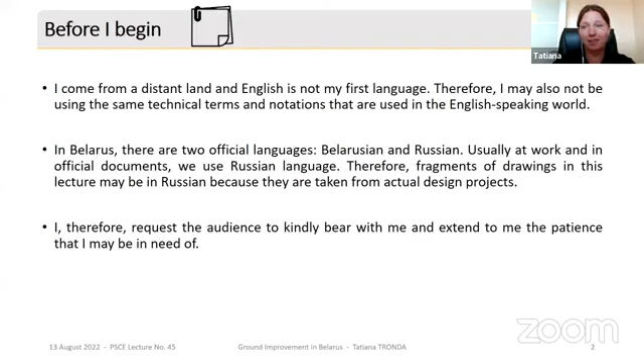My lecture is divided into several parts, listed in the slide: introduction, a short geology of Belarus, common and complicated geological conditions, the point of conventional foundations generally used here in Belarus with some examples and experience, the point of ground improvement with a short overview and history, several projects of ground improvement experience in Belarus, and conclusions and references used for this presentation.

Introduction. As we know, all loads from buildings and structures are ultimately transferred to the ground. Nowadays there are many types of foundations used to transmit loads to the ground, but in some cases ground improvement may be required. This lecture shortly covers the main aspects of geology of Belarus and presents the experience of conventional foundations and ground improvement in Belarus, comparing conventional foundations and their experience with ground improvement methods and experience. In general, 7 cases are considered in the lecture, with the main emphasis given to the ground improvement method using dry concrete columns, discussed near the end.

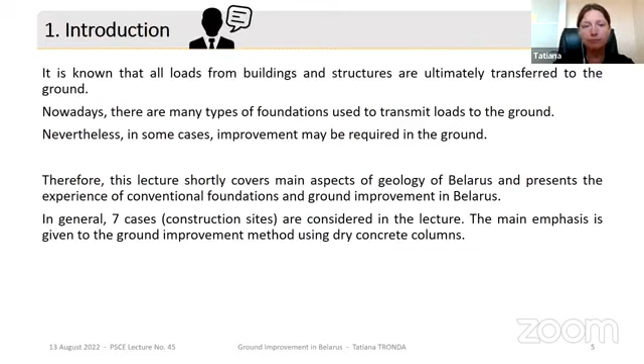Geology of Belarus. You can see in the map how far I am right now from Pakistan — Pakistan is here and Belarus is here. It's located in the eastern part of Europe.

Belarus is located somewhere between Poland and Russia, as you can see. Of course, its location influences the geology of Belarus.

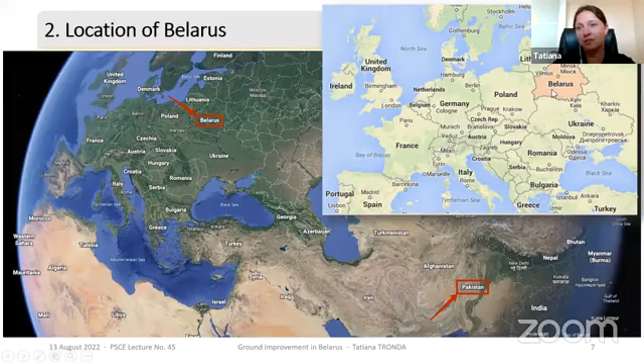Most of the territory of Belarus is covered with quaternary deposits, with thickness ranging from several meters to 300 meters. The deposits are composed of a complex of glacial, water glacial, lacustrine, alluvial, loess, Aeolian, and bog formations. A feature of quaternary deposits here is a relatively high water level.

The deposits of the glacial complex constitute about 88% of the total volume. According to classification by Matveyev, the main genetic types of deposits of the glacial formation in Belarus include moraine, fluvial glacial, and lacustrine glacial.

So for that, we can see the map of geomorphology of Belarus. Briefly, in the north of the country there are many lacustrine and alluvial lowlands. In the center, many moraine and fluvial glacial lowlands and plains, and in the south there are many lacustrine and alluvial lowlands.

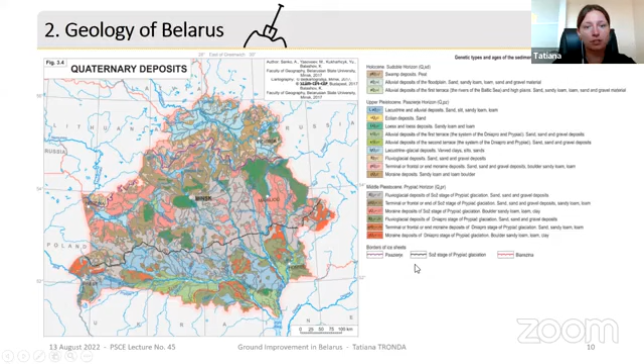As I said, common geological conditions in Belarus include sand, clay sands, and sandy clays. We also have just clays, but that's quite rare, and in most cases they are in the north of Belarus.

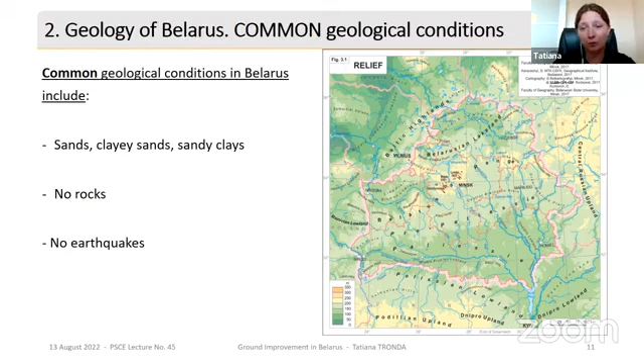So we don't have rocks, and we don't have earthquakes here, but yes, we can feel some earthquakes, though they are far from our territory. We don't usually calculate or design our foundations and structures for earthquake influence or anything like this.

Further, I'd like to share some information about common geological conditions. I took this information from one of the design projects, and you can see the geological cross-section of this construction site, and the soils which we have.

Usually a lot of sandy soils, fine sands, medium sands, gravelly or coarse sands, as you can see, but also clay sand. In most cases, yes, we have clay sands.

The next slide can show you again the same information. Just before we go back, here we can see the results of CPT tests, and the next slide shows the results of dynamic tests at this construction site.

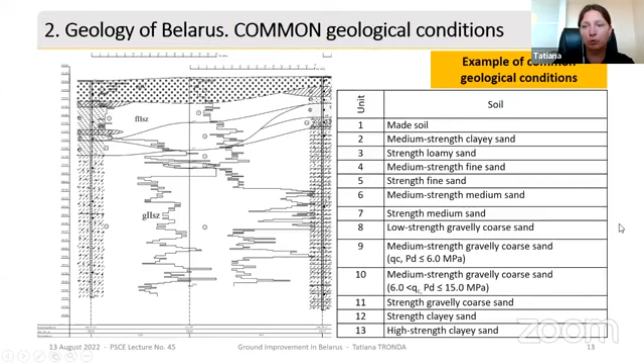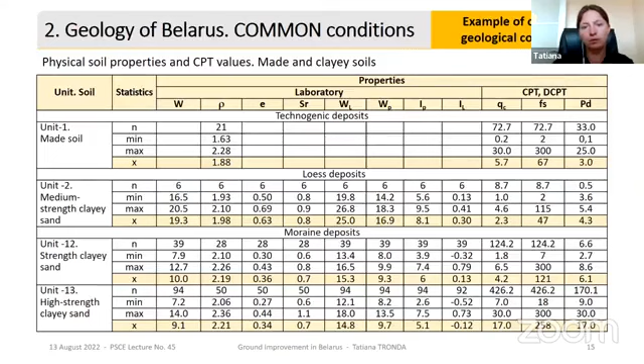Not all of our soils have such high saturation, but almost all at the top of the ground, yes, they will be quite saturated.

The next slide shows you the same information, but for sandy soils, as you can see. For loamy sand and fine sands, water content is about 7, 5, 6, 4%, and some results of CPT tests are also here. At the end of this table, you can also see some values for sandy soils.

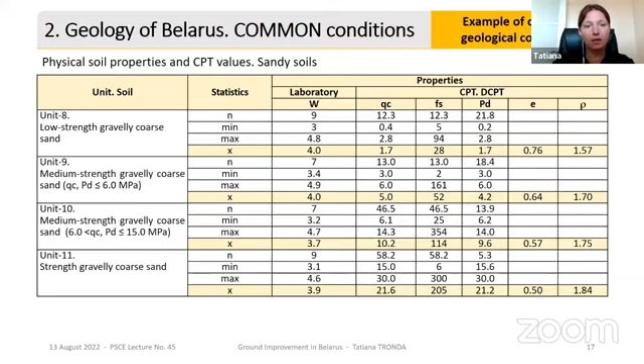So that was common geological conditions for Belarus, but if we talk about complicated conditions, we can describe them as usually including high moisture content, high water level, soft clay soils, loess soils, peat soils, soils with organic inclusions, and so on.

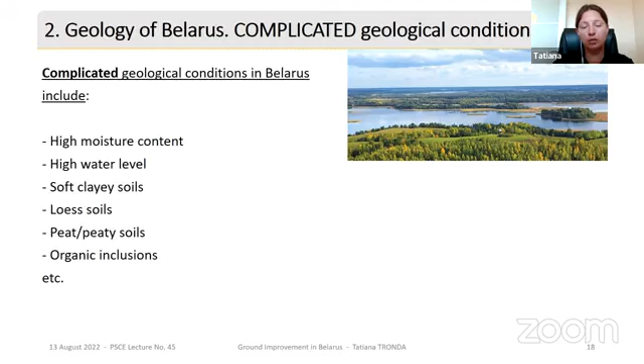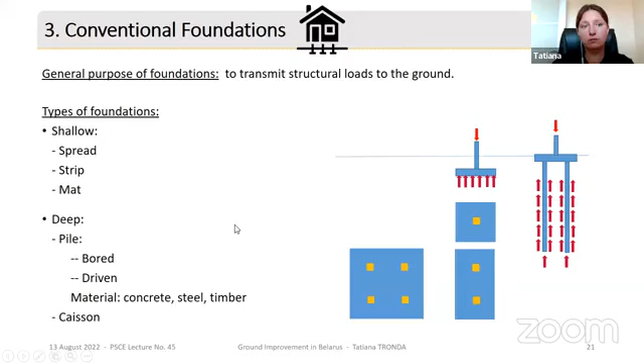This information is in general for conventional foundations, but what about Belarus? The next slide shows that yes, we use all types of shallow foundations, and also pile foundations, not only driven and bored piles, but also vibro-stamped piles. As for materials, we usually use concrete and sometimes steel, but I don't have any information about timber piles nowadays, so maybe we don't use them anymore.

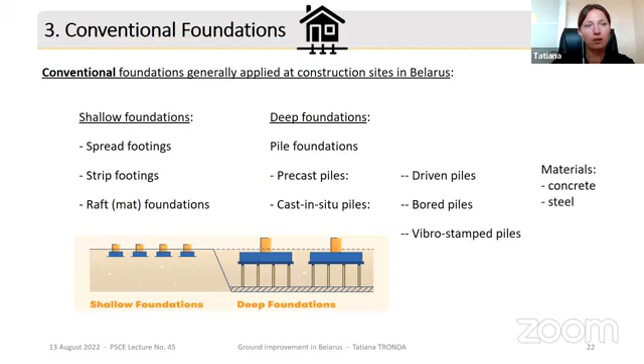So let's go further. Here I'd like to share some information about experience of conventional foundations which we use in complicated ground conditions. There will be 4 cases, for solutions, and I'd like to give this information just to compare it later with the ground improvement methods which we use for another construction site. So yes, we can apply a pile foundation almost at each construction site, but it's not usually the most suitable solution or something like this.

So the first project is an apartment house in Gomel, in the south of Belarus. Here you can see such soils as sands, but also sands with peat and organic inclusions. They are located somewhere here, unit number 10. So they are here.

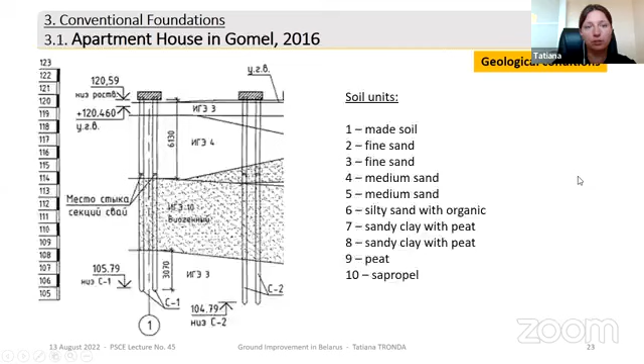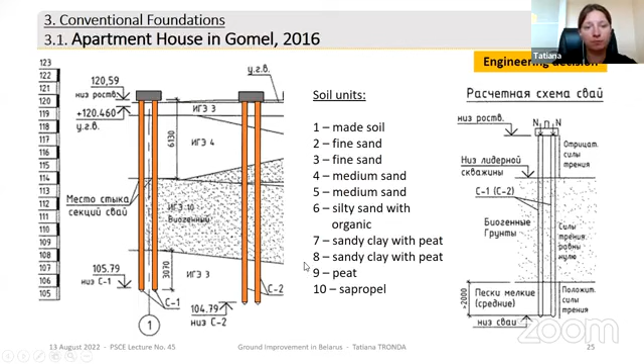So it was decided to use at this construction site ordinary driven piles. Right now you can see them in the slide here. These piles were located on the bearing walls.

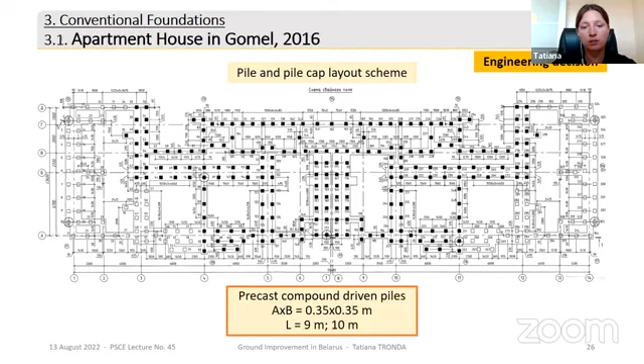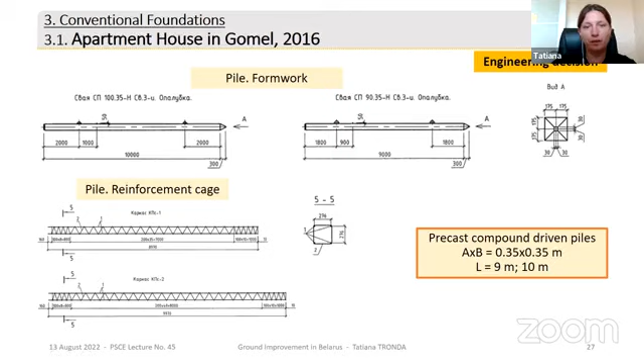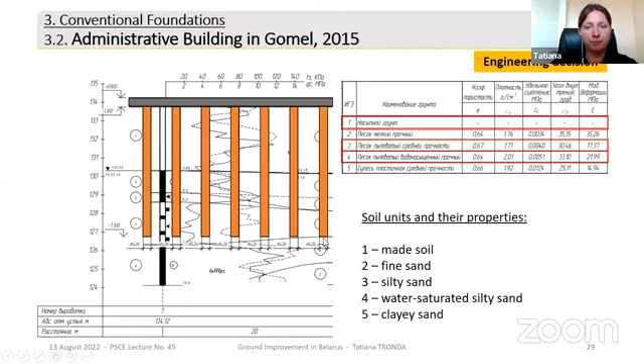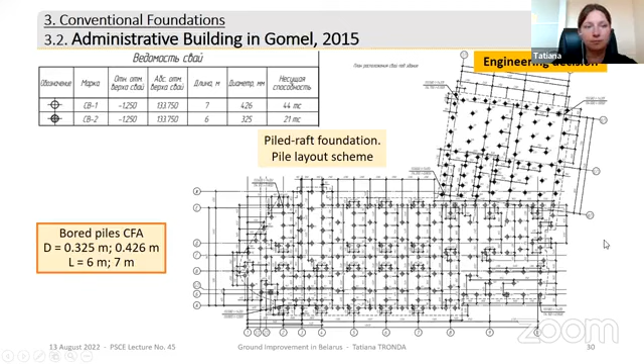So we apply piles here, and in this project there were bored piles using the CFA technology. The length of piles was 6 and 7 meters, and here in the slide you can see again the pile layout scheme, how these piles were located. The next slide shows detailed drawings of these piles, formwork, and reinforcement cages.

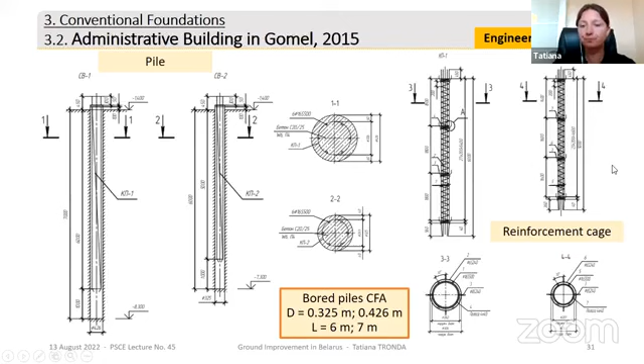Just to transfer all loads from the upper structures and building into more strong layers.

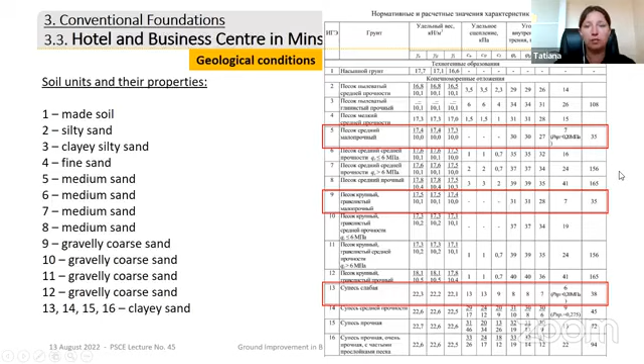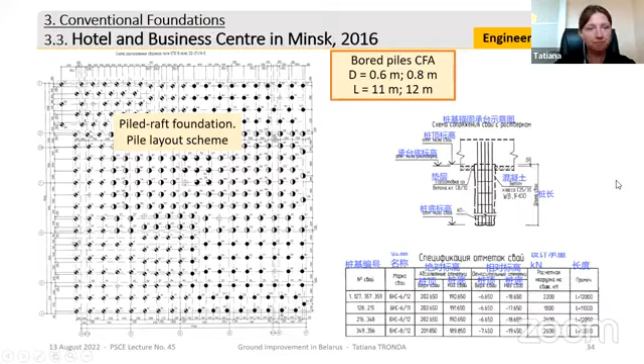Some information from the project. Don't pay so much attention to the Chinese language because it was a customer from China, so it was a double language project in Russian and Chinese. This is information just from the design documents, and some information about the reinforcement cage and about the piles, how they were constructed and installed, shortly here.

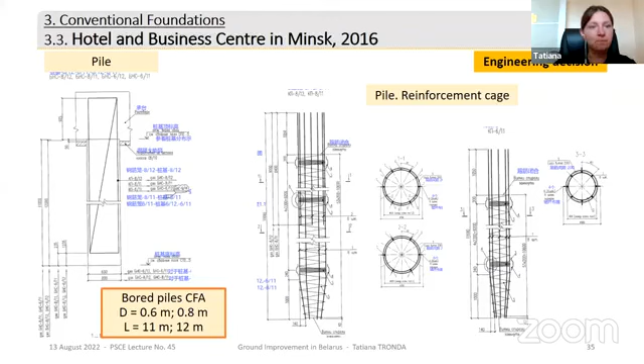Just for a remark, here we use a comma, not a dot, to divide parts of numbers. In the English speaking world we use a dot, yes, like 5.5. Just don't pay attention that we use here a comma, not a dot.

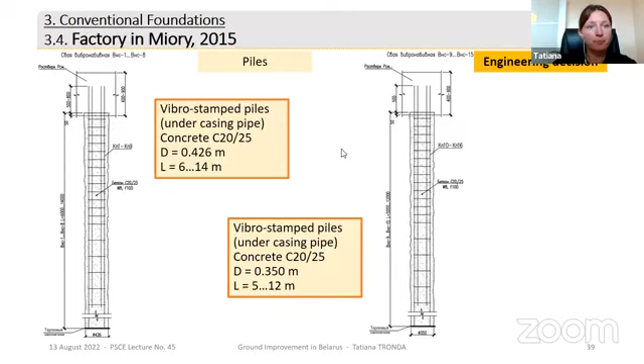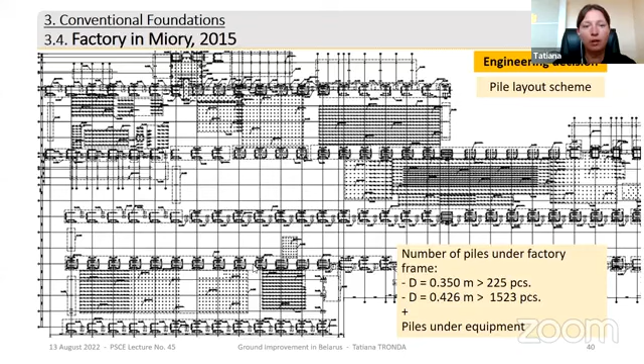This is just to show you the mass of these piles under this factory, a fragment of the pile layout scheme. It's not full here, but just to show you how many piles there were in this construction site. There were piles under bearing columns and also under equipment. Here, caps and piles under bearing columns, you can see in the narrow straight line, and in the middle, there are places with piles for equipment.

So this is all the examples, let's go further. Satisfactory foundations, as we discussed, prevent in-ground failure of strength and unacceptable settlements. Here in Belarus, we usually pay more attention to settlements, and this is obligatory for design and calculations of foundations here. But in some cases, ground improvement may be needed, for example, when one or both of the above goals may not be met.

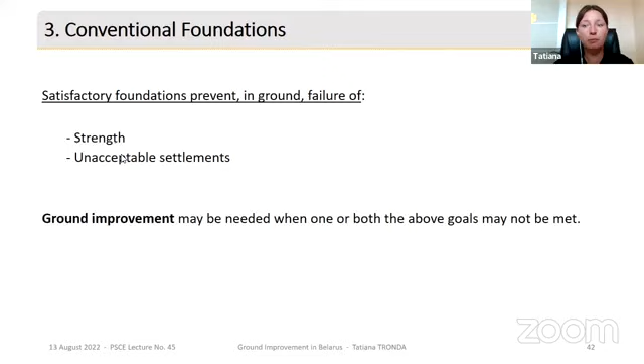The next chapter is ground improvement. Just shortly, information from overview and history. Ground improvement is the procedure typically defined as using mechanical means to improve poor ground conditions. Ground improvement methods improve the engineering properties of the soil mass, which is treated to meet project performance requirements. Common reasons for ground improvement include improved bearing capacity, increased density, control of settlements and permeability, mitigating liquefaction, and increasing slope stability.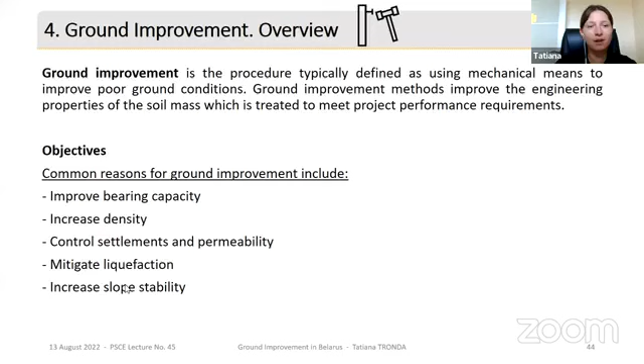So here in this lecture, we will discuss mostly the cases when we try to control settlements, as I said before, because when we have quite soft clay soils, this is the problem for big settlements which can occur after construction. So this is the main, almost the main, reason to use ground improvement in Belarus. But yes, we also use other methods, and there are other reasons for using ground improvement.

Shortly from history of ground improvement, I'd like to remind that ground improvement methods have been used since ancient times, and even, for example, about 6,000 years ago in China, rammed columns were used. Also, soil compaction methods using rammers have also been employed since Neolithic ages. Different types of rammers were used about 1,000 years ago.

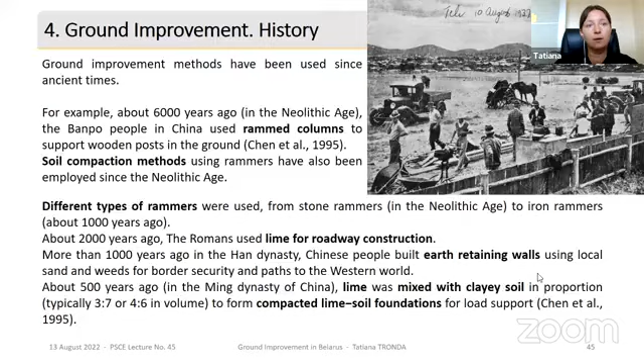About 2,000 years ago, the Romans used lime for roadway construction and so on. Many ground improvement methods were used in China in ancient times, about 500 or 1,000 years ago, and so on.

What about modern ground improvement methods? They were developed since the 1920s. For example, the use of vertical sand drains to accelerate consolidation of soft soils was first proposed in 1925, and then patented in 1926 in the United States. Also, cotton fabric was used in the United States, for example, in 1926. The vibro flotation method was developed in Germany and used from 1937. The first type of prefabricated vertical drains was developed in Sweden in 1947, and so on and so forth.

As you can see, it's not been so many years, just about 100 years, for modern ground improvement methods. So they are still in development, and there are some novel and new methods in the world.

Factors influencing the choice of ground improvement methods are as follows: the soil type, quantum and depth, and its properties, also the properties which we would like or desire to receive after improvement. Also the availability of materials, skills, and equipment which we have to perform ground improvement at a certain construction site, and economics.

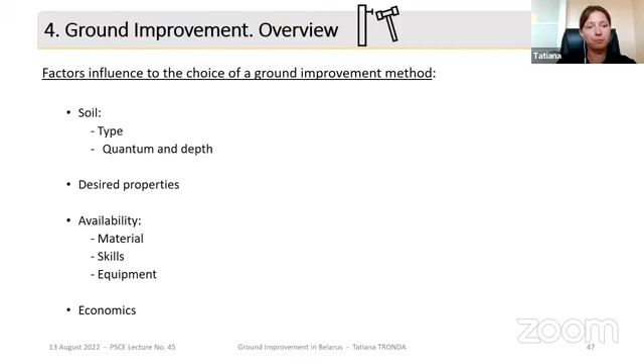The next slide shows you the classification of ground improvement methods adopted by Technical Committee 17, ISSMGE. I took this information from the website, and I'd like to share and remark on those methods which we use here in Belarus. Not all of them we use here, so in yellow you can see the methods which we use.

In the category of ground improvement without admixtures in non-cohesive soils or fill materials, we use the method of surface compaction, using a variety of compaction machines. Also, in gray you can see I marked dynamic compaction using a heavy weight dropped down. It's in gray just because we have some regulation on this method, but I have no information that we use this technology nowadays. So more often we use surface compaction.

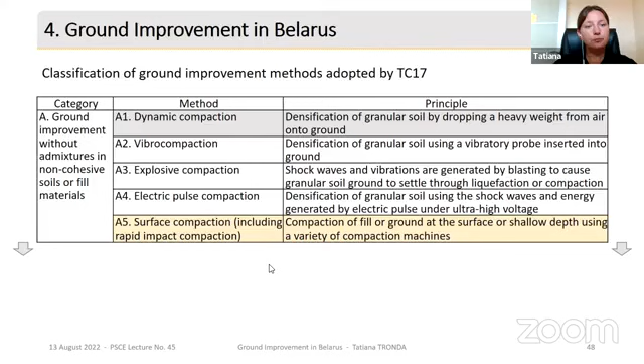The next category is ground improvement without admixtures in cohesive soils. Here you can see in yellow, again, I marked the methods which we use in Belarus: replacement and displacement, and preloading using fill.

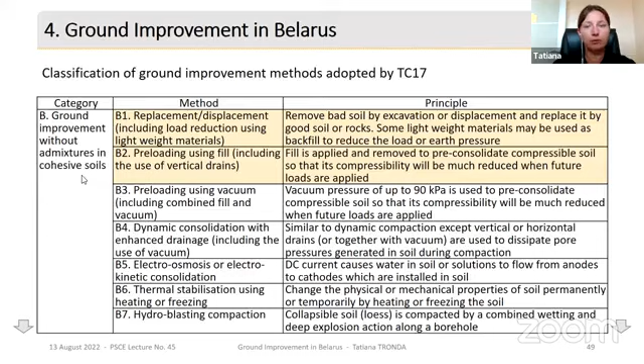The next category is ground improvement with admixtures or inclusions. Here we use methods such as vibro replacement or stone columns, sand compaction piles, rigid inclusions, and geosynthetics. I'd like to add that we also use not only sand or stone columns, but dry concrete columns, which we will discuss almost at the end of this lecture.

The next category is ground improvement with grouting type admixtures. Here we use methods such as particulate grouting and jet grouting. We use it, not so often, but yes, we can use it.

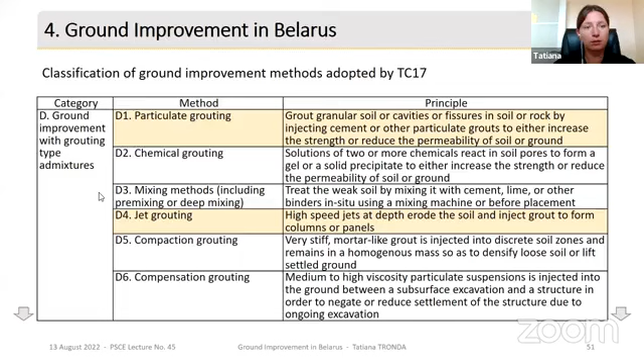And the last category, earth reinforcement. We use here almost all methods: geosynthetics, ground anchors, and biological methods as well.

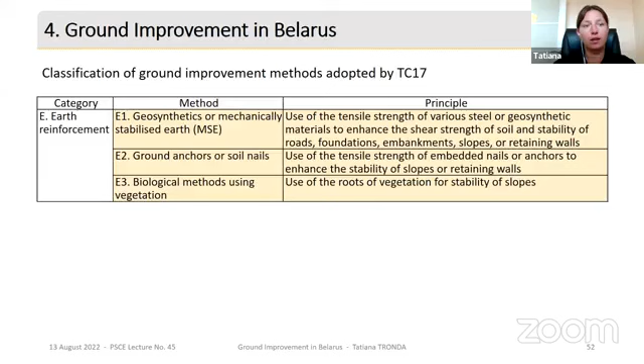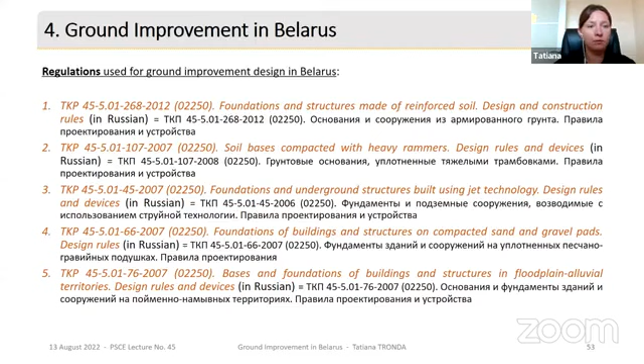So what about regulations? Here in the slide you can see regulations used for ground improvement design in Belarus. They are listed, not all, but many of them. There are 5 in the slide, but as I said, we have more.

All of them are in Russian language. I put here their titles in Russian as the original title, and I translated them into English for your information. So there are a lot of regulations, but not all of them cover all modern or new technologies, new methods for ground improvement, unfortunately. But we update these documents quite often, and many of them will not be cancelled, but like closed for use, maybe this autumn or very soon, and we will replace them with other documents, other more updated regulations.

So, here again I have some examples of experience using ground improvement. The first 3 projects, as I remember, will be combined ground improvement plus conventional foundations. Let's look more carefully at them, and then we will discuss using only ground improvement methods with dry concrete columns, as I said.

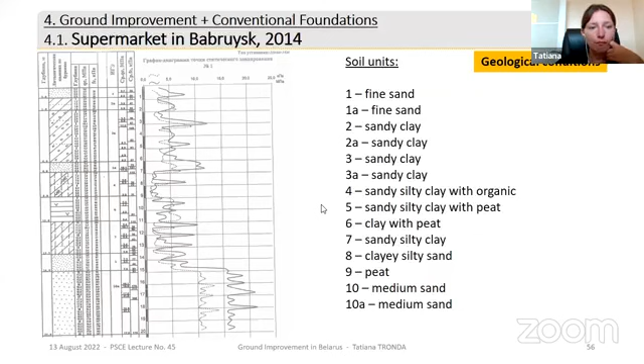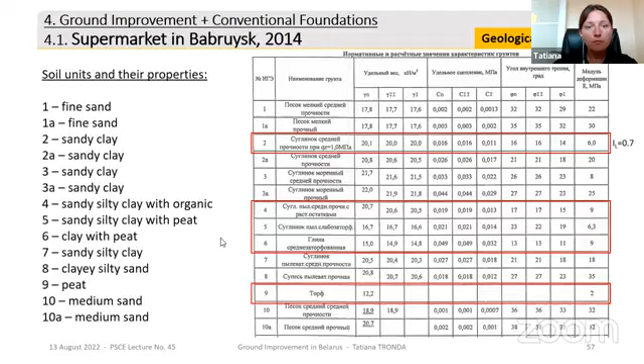So it was decided to pass through all these weak soft soils and transfer the loads to the strongest soils. We used piles for these purposes. As you can see in orange here, it is a pile, but we also use conical piles for ground improvement.

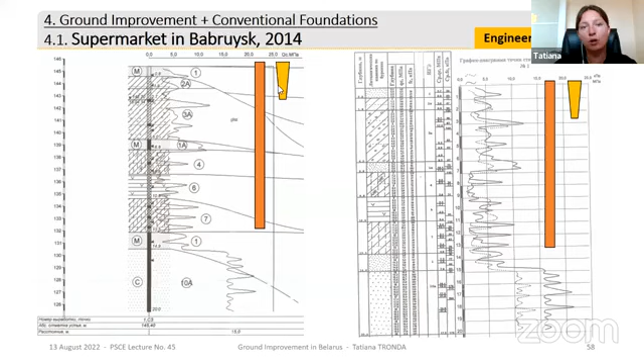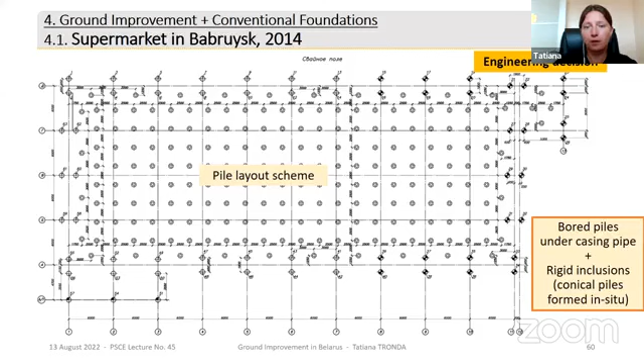Under bearing columns we used bored piles formed in situ under casing pipe, and the length of them was 13.5 to 14.5 meters.

And under the floor we used rigid inclusions, and you can see the drawing of this inclusion performed as conical piles formed in situ with a length of 3 meters and diameter from 0.325 up to 0.63 meters, from the bottom to the top of this conical pile.

This kind of pile, I mean conical piles for ground improvement, allows us to compact ground at upper layers between the columns, these conical columns. They are quite common for ground compaction at the top, and we can use them for ground improvement of top layers. It is quite common now, not a new or novel technology - it's quite old technology, and it has approved results, I'd say.

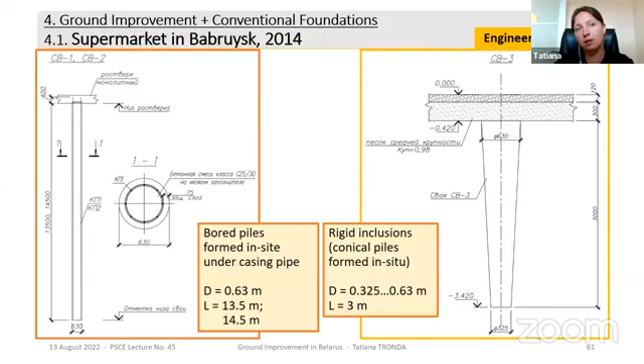So we use them to compact upper layers, and of course it helps us improve properties of upper layers, and then to transmit the loads, as in this project, from the floor of the supermarket to the upper layers - with no piles on the floor, not applying a big mat or pile raft foundation, just ordinary piles with caps and ground improvement under the floor.

The next project is an apartment house in Minsk. Let's look at geological conditions. We have many layers, many sandy soils - fine sands, medium sands, gravelly and coarse sands here.

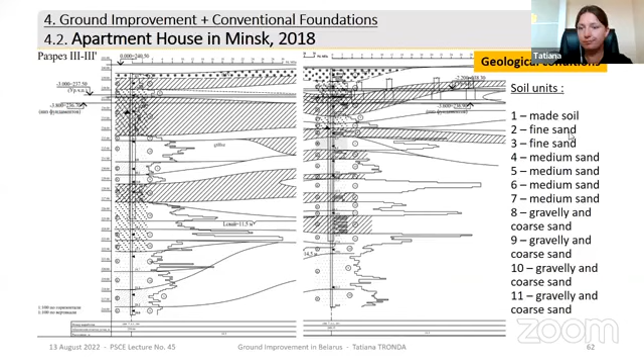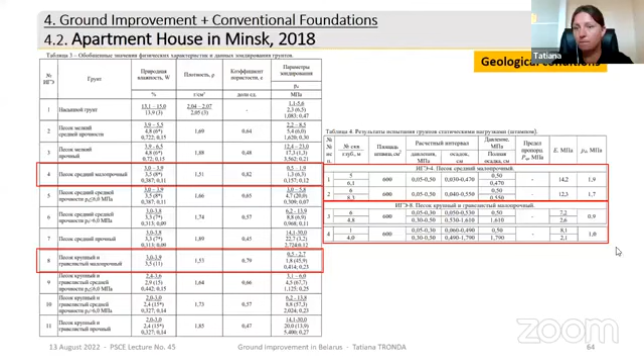Let's go further. So here we have loads to foundation scheme. You can see the shape of the building, the shape of this apartment house. According to the geological conditions, it was decided to use pile foundation. Piled raft foundation was used in the main part of this building. I will show you in a second where.

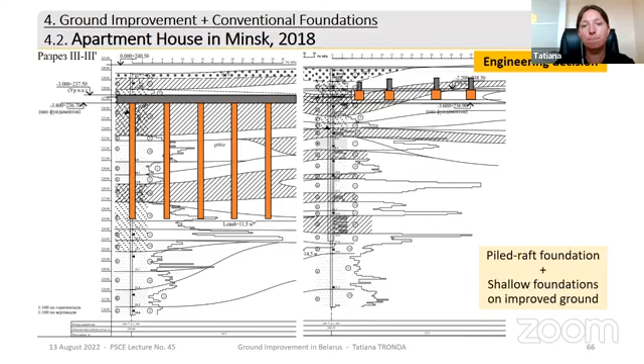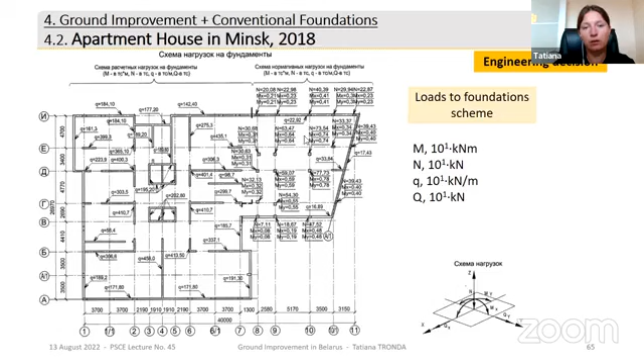And in the other part, we used shallow foundations on improved ground, in those parts where loads were not so high. Let's go back, and I will show you: in this main part of the building we used pile raft foundation, and in this part, in the right upper corner, we used shallow foundations with ground improvement under them.

Let's go further, and I will show you here in the scheme the raft and foundations layout. This is the slab, the foundation slab under the main part of the building, and this is the part with the shallow foundations here in the center, with the ground improvement. So which kind of ground improvement did we use here?

This part here in the right upper corner - here you can see we used two types of ground improvement in this project. Just compacted sand ground under some of the foundations, and on the others we used inclusions, concrete piles formed in situ. We used concrete class C8/10, diameter of these piles was 0.42 meters, and the length was only 6 meters.

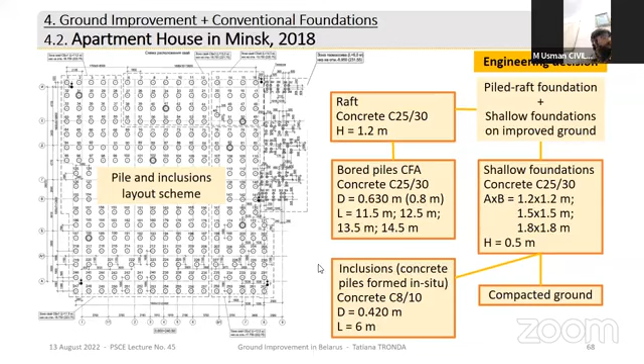So here you can see these foundations, I mean shallow foundations, upper foundation. Upper drawings are made for foundations on compacted sandy ground, and the lower drawing is for shallow foundation on ground inclusions. So these rigid inclusions were applied only on the shallow foundations, just to improve weak soils on the two-story part of the house, in those places where loads are lowest.

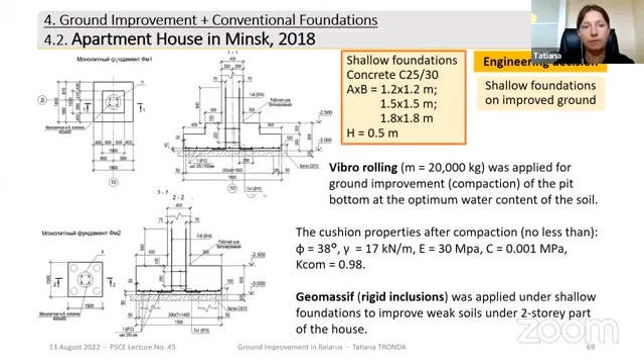Made of concrete class C8/10, almost the lowest class, and without reinforcement cage, just because we wanted to use these inclusions to improve soil properties, to improve the base, and this can allow loads to be transferred to upper layers of the soil, not to the lowest, strongest soils and layers, since we don't have such high loads in this part of the building.

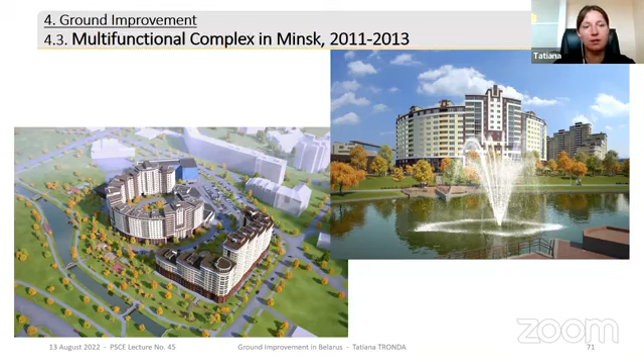So shortly, there are some apartments at upper stories and some shops at ground level in this building. So what about geological conditions of this construction site?

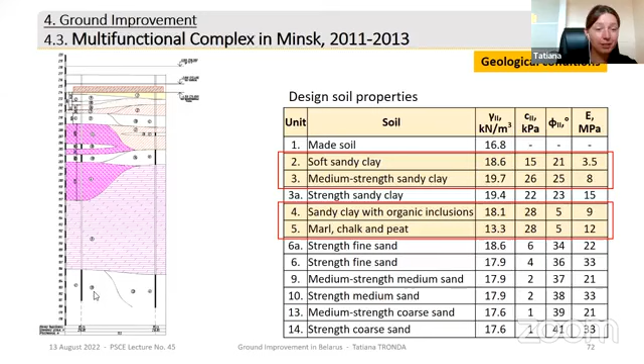So according to these geological conditions, it was decided to discuss several solutions for this construction site. And we compared pile foundations, as quite commonly used here, and ground improvement.

The first solution was to apply pile foundations, and you can see a fragment of this project here. We should pass through all these weak, soft soils, number 4 and number 5, and transfer all loads to the strongest layers, number 10 and number 13. So in this case, piles should be about 30, 32, 35 meters long—quite long piles.

But we suggested—it was my colleagues, professors from my department, from my university—we suggested to use the ground improvement method. Quite new, but it was suggested to use dry concrete columns.

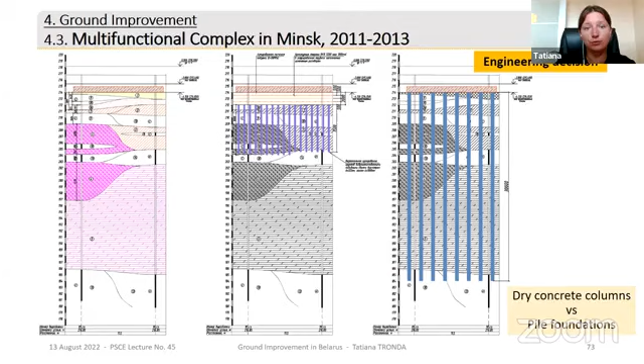In the next slide you can see how these dry concrete columns look in cross section—just a column filled with dry concrete. In this project, the length of these dry columns was about 3 to 12 meters, their diameter about 0.3 to 0.5 meters, and we used concrete class C8-10, almost the lowest. Why? Because it allows us to save money for this technology, but it works even with such a low concrete class.

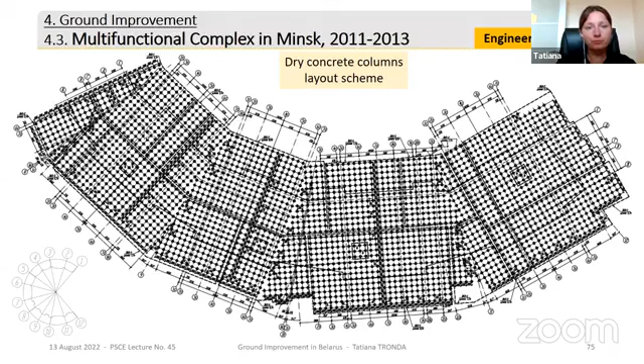Now, more detailed about dry concrete columns and some research which I and my supervisor made, because this is the topic of my dissertation, so I'd like to share some information that we received.

Dry concrete columns, as we discussed, are made of dry concrete mixture—dry concrete ingredients without water, just ordinary, almost the lowest class of concrete, C8-10 for this purpose. We use dry concrete ingredients and insert them into the ground using a casing pipe.

After that, we pull out this casing pipe, and our dry concrete mixture allows it to absorb surrounding water. I haven't mentioned before that the upper layers were water saturated, but they are quite soft—number 2 and 4, clay, soft clay sands, they are saturated—and this technology allows absorbing water from these surrounding soils. So the dry concrete ingredients absorb surrounding water, and at the end we have hardened columns.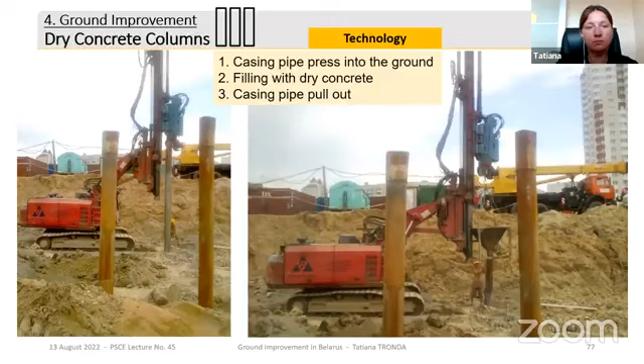Then, as I said about these columns, we used a sand cushion with reinforcement. Here in the slide there are some photos from the construction site where this cushion, this sand layer, was made. So filling up and compaction of the sand cushion at the two first pictures here. Compaction you can see, and how it looks like. Reinforcement, horizontal reinforcement of the sand cushion, you can see in the third photo here.

These are steel in plastic pipes filled with mortar. It's not just steel in the soil, in the sand. No, the steel is in plastic, placed in plastic pipes.

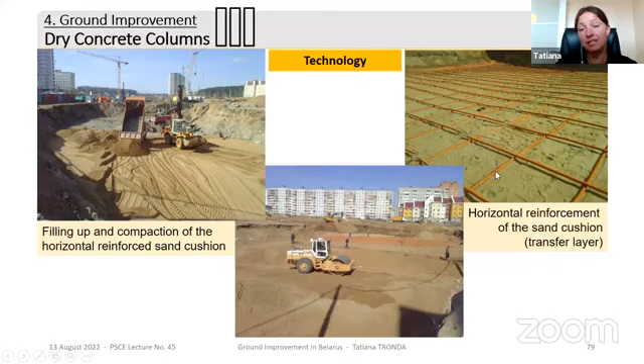So about some in-situ tests I'd like to tell. Here in the slide you can see the results of CPT tests before and after application of dry concrete columns. The blue line is for before application of columns, and the red line is for results after application of dry concrete columns.

You can see that almost at each point we have an increase of modulus of cone resistance. So almost everywhere the red line has higher values than the blue line.

And these tests were performed in order to prove the possibility of using such technology, that this technology works and we can use it at this construction site, just to prove it.

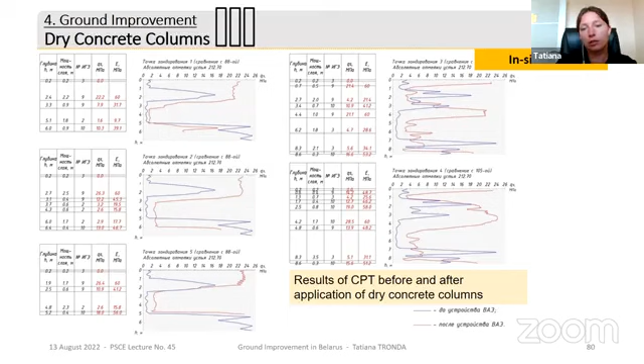Okay, so also we had several static load tests at this construction site. Here you can see some of the results. First point and second point here, and in the table you can see again the modulus of deformation which we received. It was 56 megapascal and 52 megapascal after application of dry concrete columns, because before, as we already saw, we had a modulus of deformation of about 8 for this layer.

For the clay sand layer, we had only 8 megapascal. So results were quite impressive. And after this test, we decided yes, we can apply this technology at this construction site, and it works.

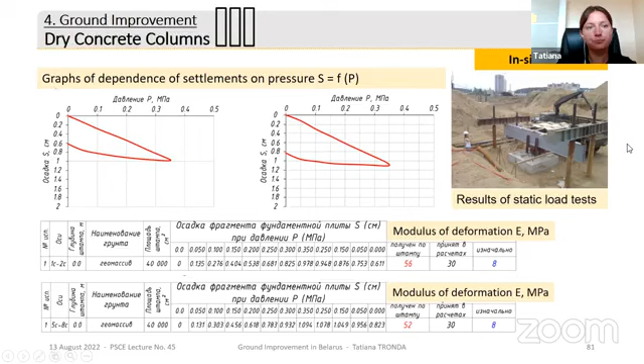Then also we had a series of laboratory tests. Here I'd like to share 3 of them. The first test was performed to show applicability, to show that we can use this technology instead of piles, and we used laboratory tests for this purpose.

Several fragments were made. You can see in the slide here different lengths of dry concrete columns: 20, 15, and 10 centimeters long. Also the same shape, the same length, and the same soil was used for tests with ordinary piles. And we would like to compare them.

So here in the slide you can see the results for these tests. The first red line is just for the slab, where only the stamp was applied. Just a second—here we have just the slab without piles, and we tested this slab only, and the result you can see here in red, in this red line.

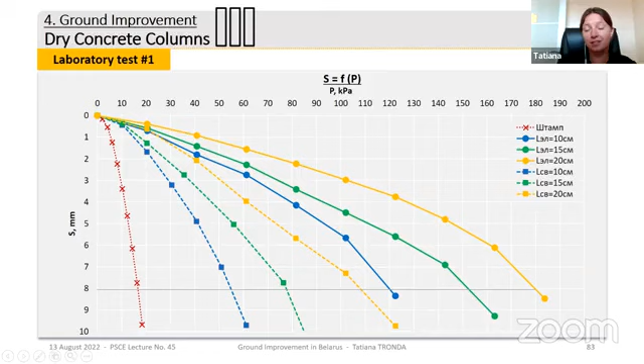So as you can see, we received quite good approval that dry concrete columns work in soft clay soils. Yes, these results were received in laboratory, but they were also quite impressive. Just to show quality of the picture, you can see these results that this technology works.

To compare these results, we draw some graphs. Here you can see the blue line for piles only, and the green line for dry concrete columns. This shows a coefficient of reinforcement. When we use only piles, we just have reinforcement influence. But if we use dry concrete columns, we have not only reinforcement but also drainage of saturated clay soils. This allows us to increase reinforcement and improvement of our clay soils.

The next graph shows the increase of modulus of deformation. Again, the blue line is for pile foundation, and the green line is for dry concrete columns. We can see that dry concrete columns have much more influence than ordinary pile foundations in these conditions. This is thanks to absorption of water from surrounding soils.

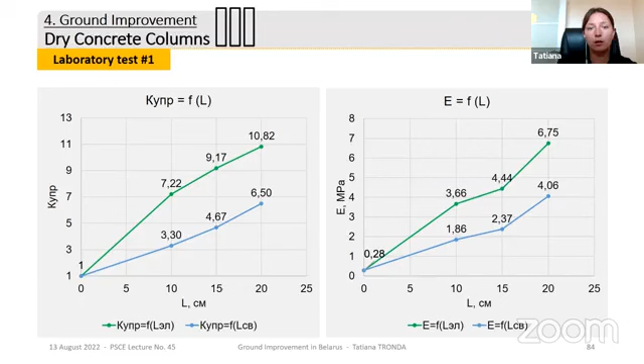The next test we had in the laboratory was made to prove the change of water content in clay sand, and to achieve some results on density of dry concrete columns. We tested them on a press, as you can see in the photo. Properties of the soft clay sand which we used for this test are mentioned in the slide. What we received at the end of this test, you can see in the table.

We would like to show water content changes, and this experiment lasted 56 days. On the first day, water content was 13.7%, and at the end of the experiment it was 12.5%, which allowed liquidity index to decrease from 0.7 to 0.5.

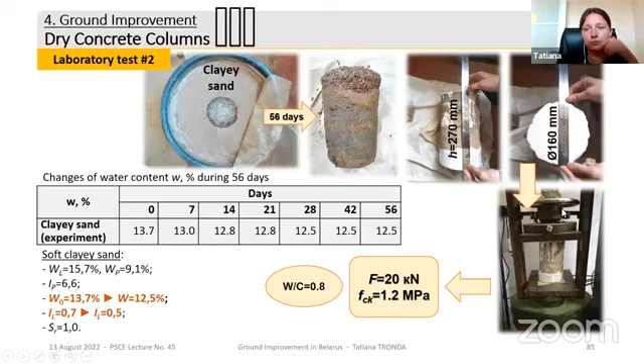At the end of this experiment, we tested our sample of the dry concrete column and received a force of 20 kilonewtons at which it was broken. In this experiment, the water to cement ratio was 0.8, which we calculated at the end of the experiment.

I'd like to add information about the second sample we also tested. The first one we discussed, and the second was made of concrete with more cement. You can see the ratio here for sample number 1 and sample number 2, made of concrete, sand, and gravel. We used more cement for sample number 2, and as a result we received a force of 25 kilonewtons for that sample.

Of course cement influences the results, but it wasn't the main objective to increase the strength of these dry concrete columns, because the main purpose is to improve soils at upper layers. So these values are higher than would be needed for soils. The main principle of reinforcement is to include inclusions which have more strength than the soils we try to improve.

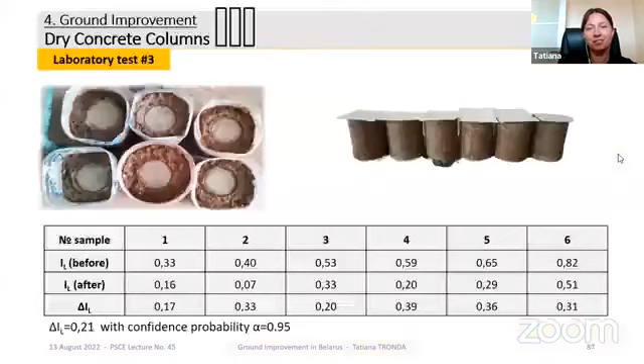There are many types of foundations which we use in Belarus, and their choice depends on geological conditions of a construction site, as we discussed, availability of materials and equipment, and also economics. Generally, construction sites are presented with sands, clayey sands, and sandy clays in Belarus. In these cases, conventional foundations are used, usually pile foundations.

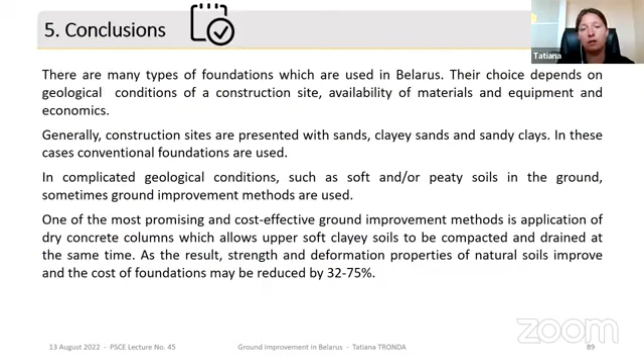In complicated geological conditions, such as soft or peaty soils in the ground, sometimes ground improvement methods are used. In Belarus, one of the most promising and cost-effective ground improvement methods is the application of dry concrete columns, which allows upper soft clay soils to be compacted and drained at the same time. As a result, strength and deformation properties of natural soils improve, and the cost of foundations may be reduced by 75%, as we discussed for the project in Minsk, the multifunctional complex in Minsk.

Thank you so much for your attention, and right now we have time for questions, so please, I would be glad to answer your questions if you have any.

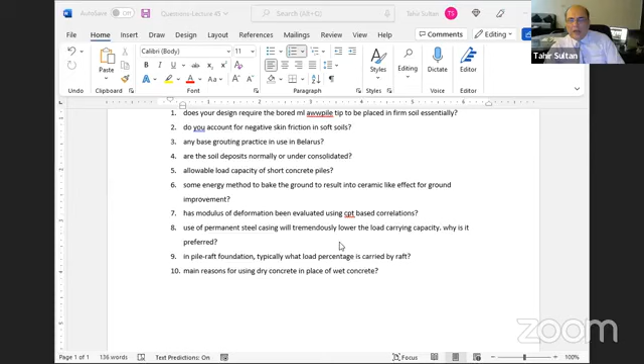Now, the question number is the sixth question, number 6. Some energy methods to bake the ground to result into a ceramic-like effect for ground improvement.

I suppose we have some information on regularities, but I don't think we use something like this method to bake the ground. Maybe I don't have so much experience in this, so I don't know. Okay, we leave it there.

So number 7 is, has modulus of deformation been evaluated using CPT-based correlations?

Sometimes modulus of deformation is evaluated using CPT, but sometimes from static load tests, and sometimes from laboratory compression tests, oedometer tests or something like this. It depends. In most cases, yes, perhaps using CPT, but not for all soils. For example, if we receive the lowest values from laboratory tests or from static load tests, then we will take these values for our calculations, just for safety.

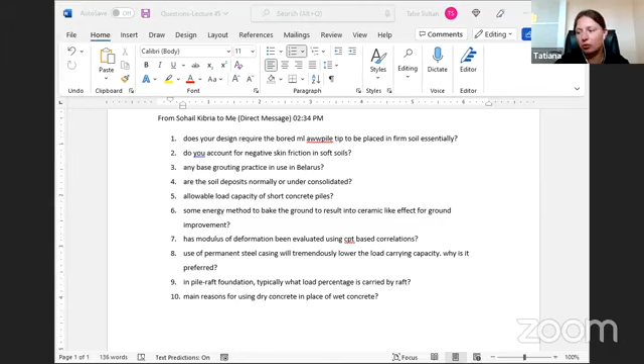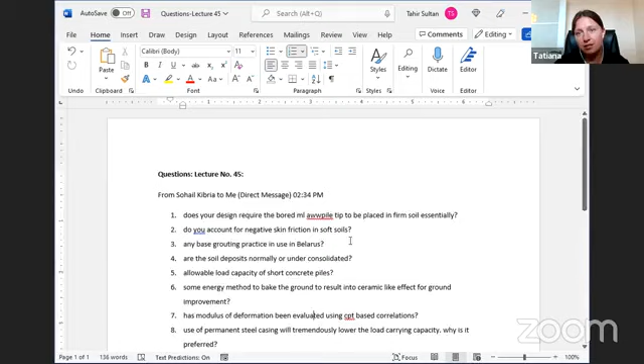And also it was, you know, like one of the experiments, will it work or not. So yes, we can have this solution also, but it was decided to use something novel, and we applied dry concrete columns there.

Maybe I should mention it wasn't the only construction site where we used this technology; at some similar sites we also used dry concrete columns. So it is quite a promising method. But for some special geological conditions, not every construction site will suit, but in general those construction sites have quite low strength soils at the top, middle, and depth, and we would like to improve the upper layers to have a possibility to transfer loads onto these upper layers.

Our very senior participant, Mr. Suhail Raza, is asking: by dry concrete, do you mean a mixture of crushed stone, aggregate, and sand only, or without cement? He's asking whether the dry mixture is without cement or with cement. I think it was with cement.